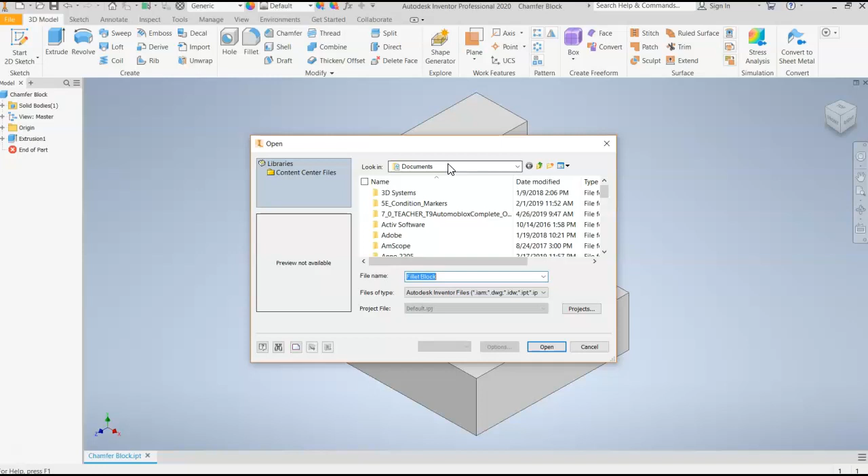You may just have to start Inventor and then go into your files that you saved up here, and then find your file. You can look in My Documents if that's where you saved it. Use your up one level to go to your desktop. If you saved it somewhere else, you can go up one level and then maybe go to your OneDrive. So anyway, the point is to find your file.

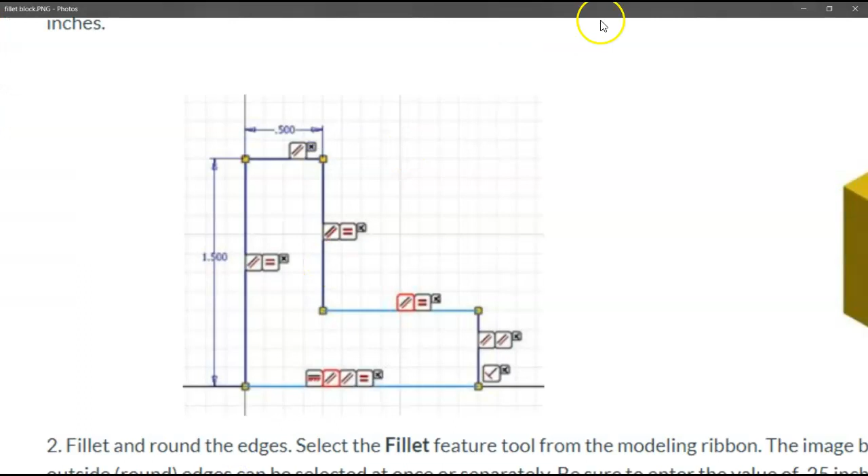You may have to go down to your Windows search with your magnifying glass, and if you saved it as chamfer block, you should be able to type that in and find it. Otherwise, go back and watch the fillet block video and recreate the part. So here's where we're starting with the chamfer block. I need to find the instructions. This is the instructions for the fillet block. Let's see if I can find the instructions for the chamfer block.

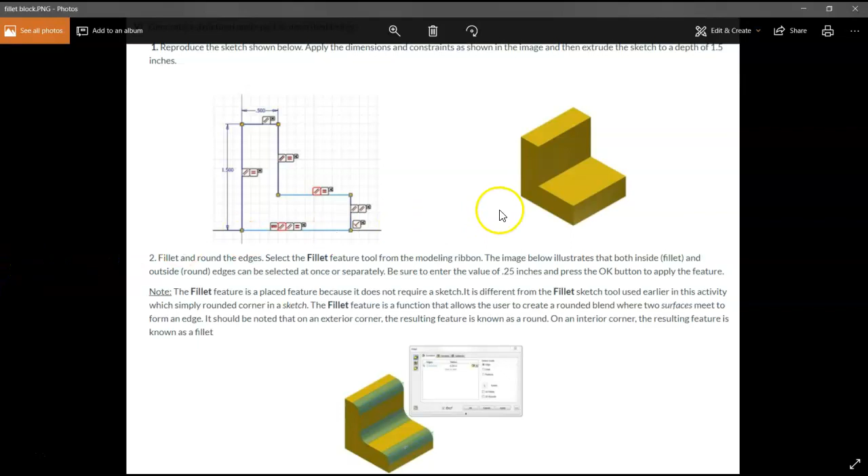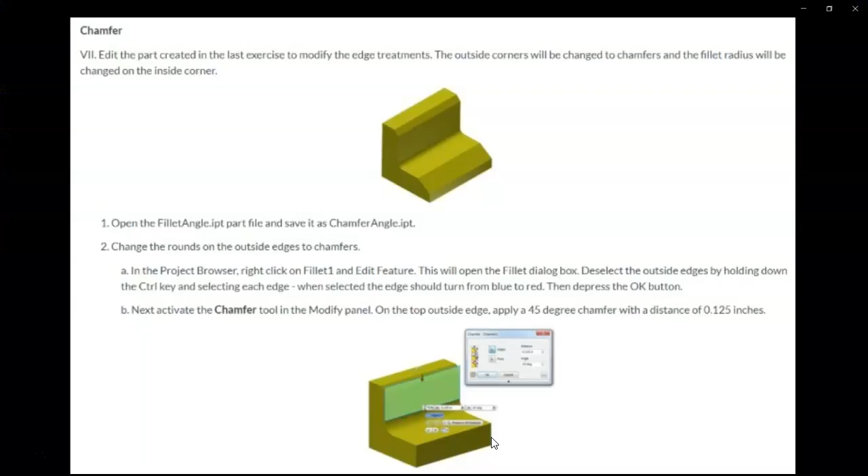All right. I took an image. There's chamfer 2. Here's chamfer 1. So, edit the part created in the last exercise, which was the fillet block, to modify the edge treatments. The outside corners will be changed to chamfers, and the fillet radius will be changed on the inside corner. So open the file. We've already got this. All I'm going to do now is just apply the different chamfer sizes.

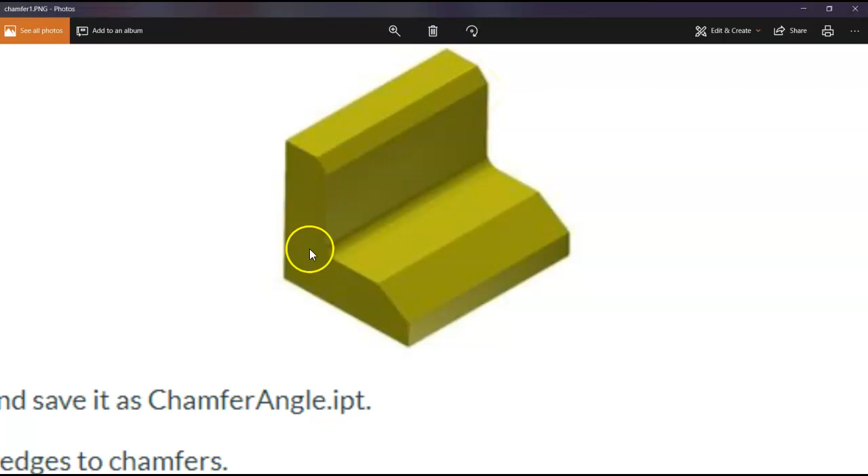So when they say chamfer, instead of rounding off the edges, we're going to make a flat cut. In construction, they refer to this as a dog ear if you're talking about a wooden plank, but you also may refer to it as a bevel. If you think about fancy glass or a diamond ring, the edges have been cut down to a face, and that's called beveling. For our purposes, we're going to just call it chamfer.

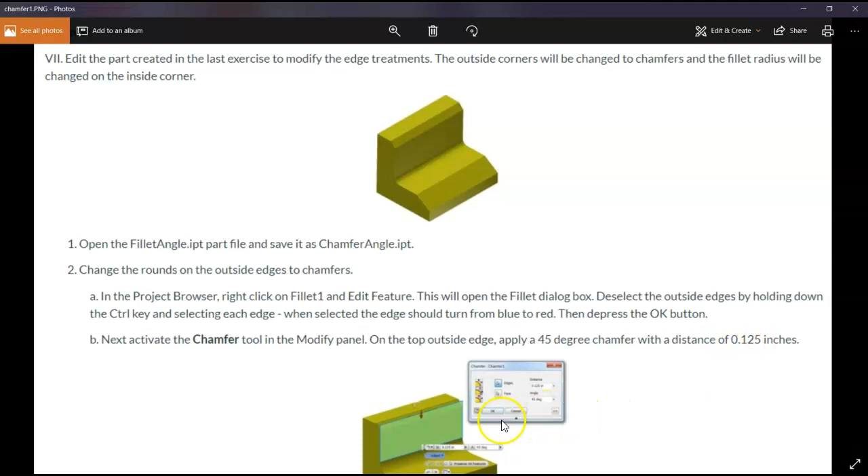On the top outside edge, which is this one, we want to apply a 45-degree chamfer with a distance of 0.125. Let's zoom in real quick. I know it's a little blurry, but you're going to have 3 different chamfer options. The one that we want is distance and angle, so we have to make sure we find a distance and angle chamfer.

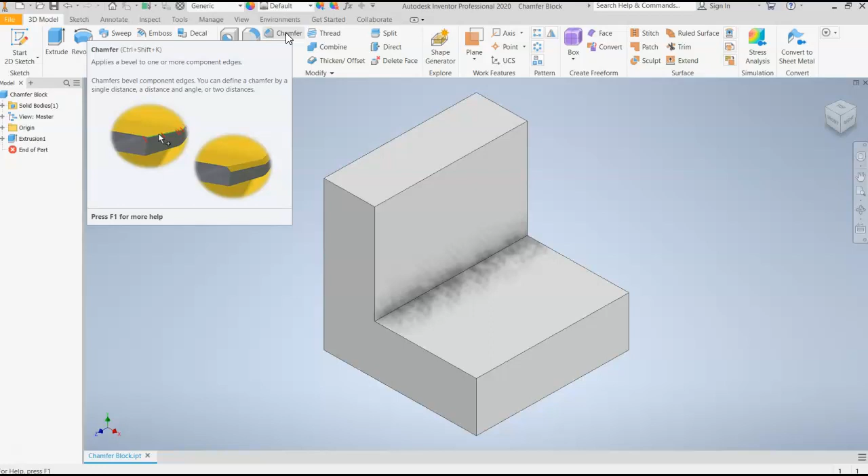So let's go back to Inventor. The chamfer button is here. If you hover over the button, it shows you how to do a chamfer. You can press F1 for more help. So we click on the chamfer button, and here's my window with 3 different options. Option 1 just gives me a distance, not an angle. This is basically going to make it a 45-45, so you don't have an option to adjust the angle.

The second button has a distance and an angle, and that's the one we want. We are going to make a chamfer using these 2 measurements. Notice how the blue highlight is on face. This is prompting you to select a face, either this one or this one. Let's go back to the instructions and see which one it wants. Yeah, this one has been selected. That's the face we're selecting. So let's select this.

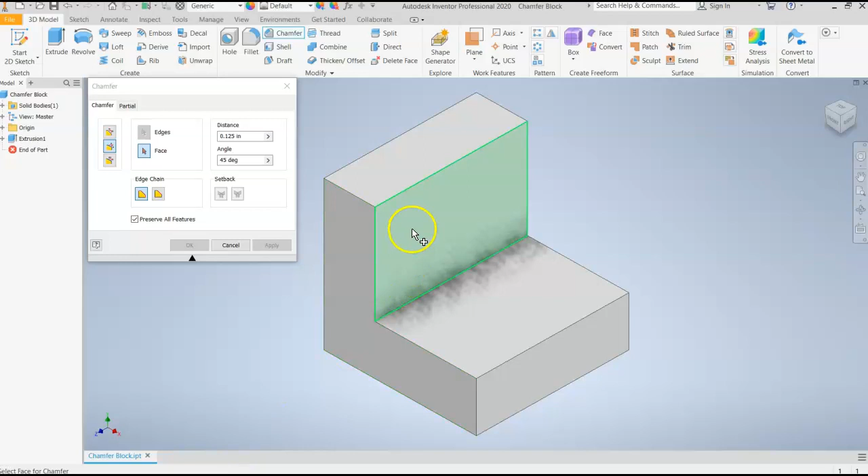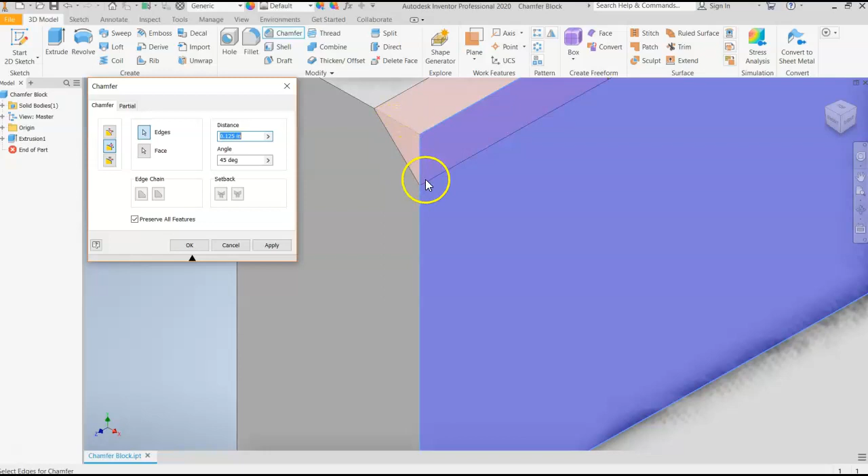And now select an edge. Face was blue, we selected a face. Edge is now blue. I'm going to select this edge. And there's my 0.125 and my 45 degrees. If we zoom in here, you can see how it's cutting off this corner. Once I click OK, there it is. It has chamfered that corner.

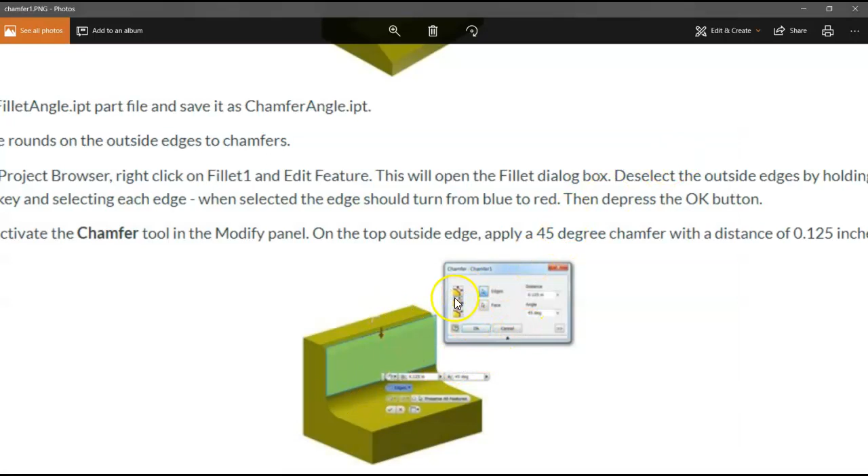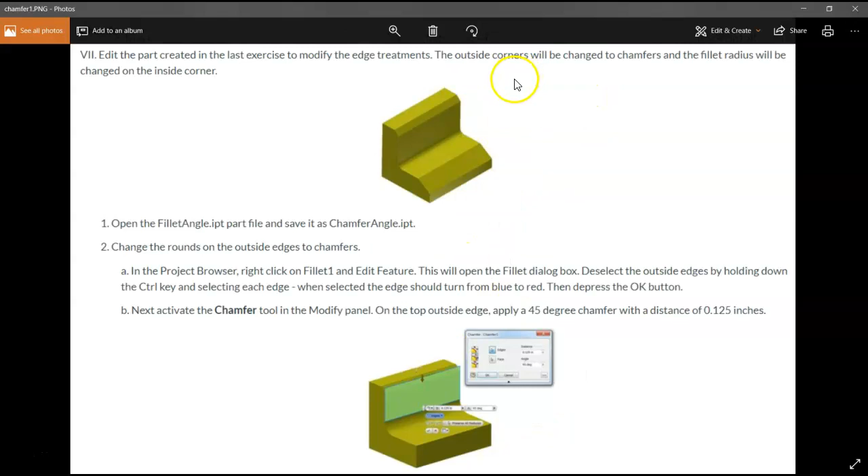We're going to do the same thing down here, but let's look at picture 2. Here we go. We want different sizes. This goes A, B, and now I'm missing C. Well, these are my instructions for C, so I'll zoom into that. This time we want distance 1 and distance 2. Boy, that's blurry. It looks like distance 1 is 0.25, distance 2 is 0.125, I'm going to call it.

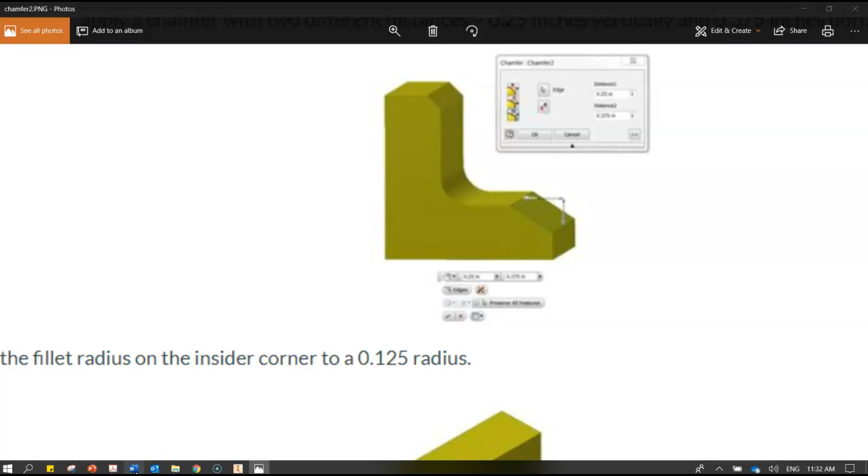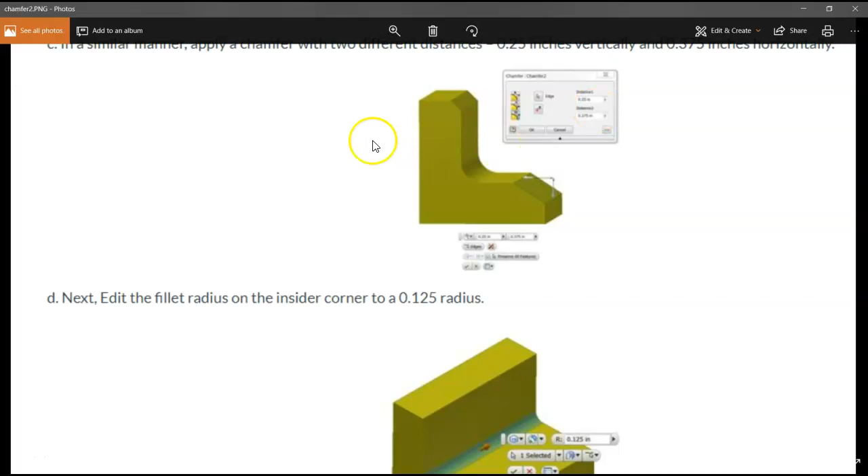Actually, let's see if we can open the original document and see if it's any better. It's cut off a little bit, but I might be able to see it. 2 different distances, 0.25 and 0.375. That's what we want. So 0.25 and 0.375. Those are the dimensions I'm going to use.

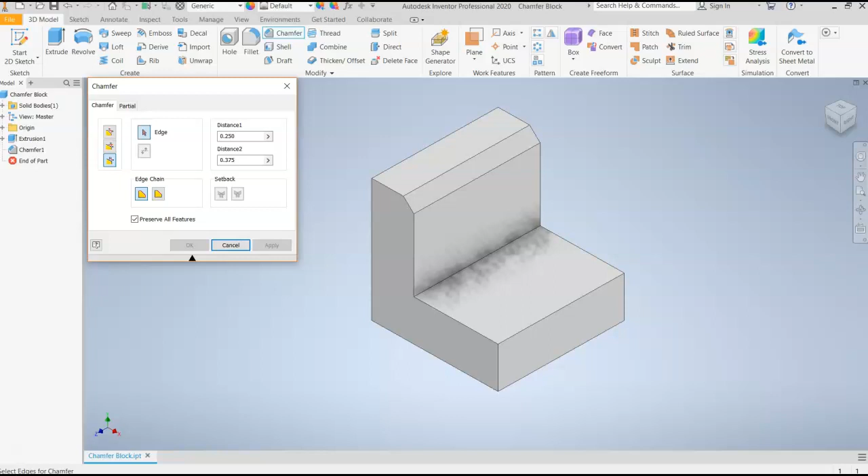Chamfer. Change to 2 distances, distance 1 and distance 2. The first distance is 0.250. The second distance is 0.375. Now I choose an edge. Here's the edge. Is that the way I want it? Notice we have a long side, from here to here, and a short side, from here to here. If we look at it from the side view, this is shorter than this.

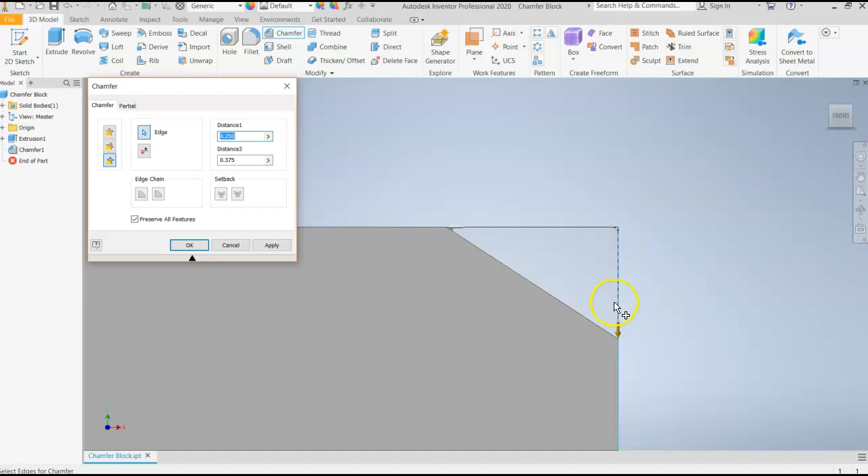So this is 0.25, the vertical. Whoops, I think I messed up. Yeah. So 0.25 is vertical, and 0.375 is horizontal. That's what I want, I believe. I'll go back and look at the picture. Yep, that's what I want. All right, so we click OK.

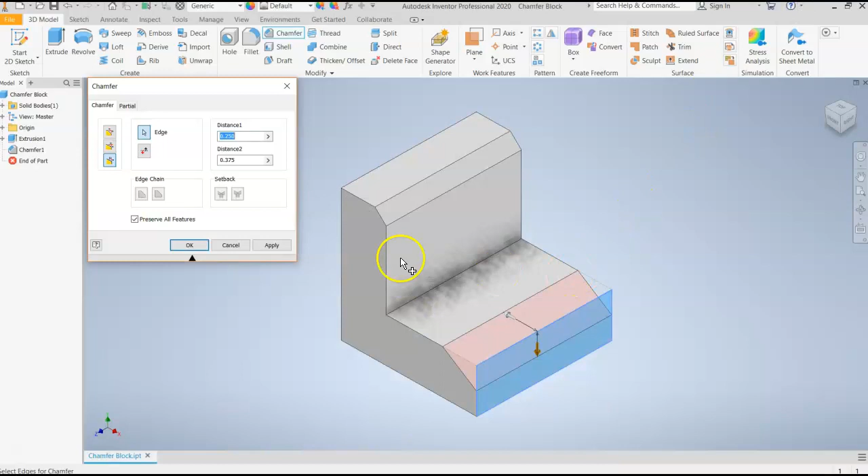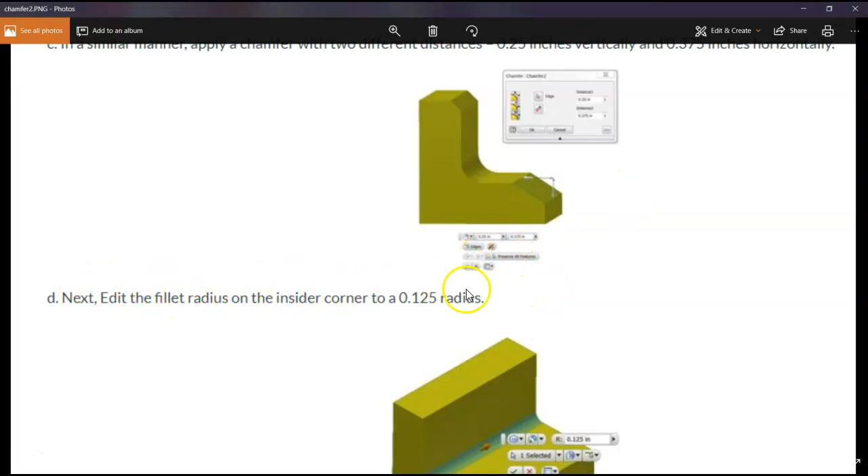The final piece is to fillet this back part. Instead of a chamfer, we're going to put in a fillet. Let's go back to the image. We want a fillet with a radius of 0.125. So fillet, 0.125 radius, and select that edge. Click OK. And this is the chamfer block.

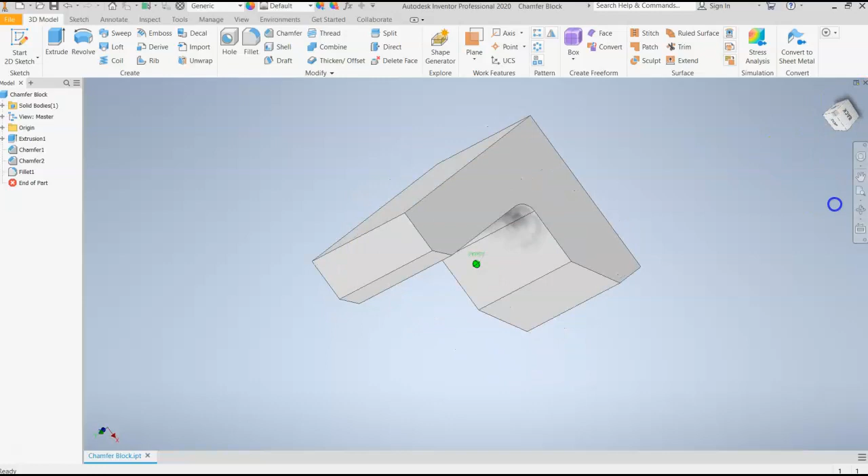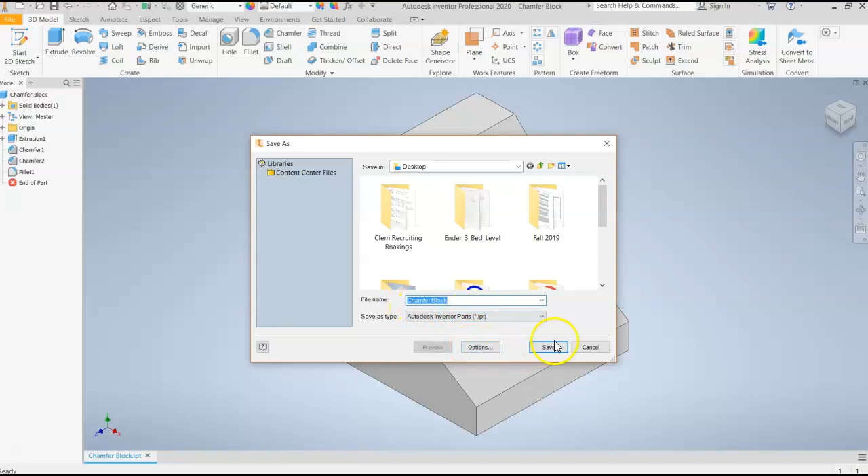If you get it swirled around and mixed up and it's hard to fix, hover over here on the far right and you see a little house. Click on the house and it takes you back to your original view. Okay, that's the chamfer block. Let's make sure it's saved properly. Save as, chamfer block. Do I want to replace it? Yes. And that is the chamfer block.